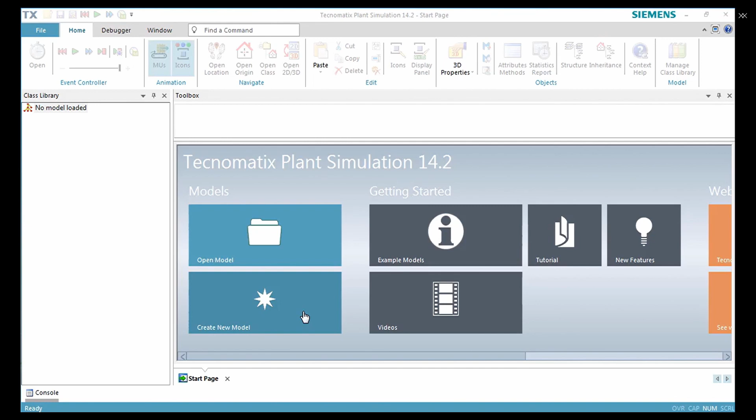This video demonstrates how to work with an exit strategy to make a machine distribute parts among its successors within the production line. As a rule, you will use an exit strategy instead of default transfer behavior when the sequence of operation does not uniquely designate the next station that handles the part.

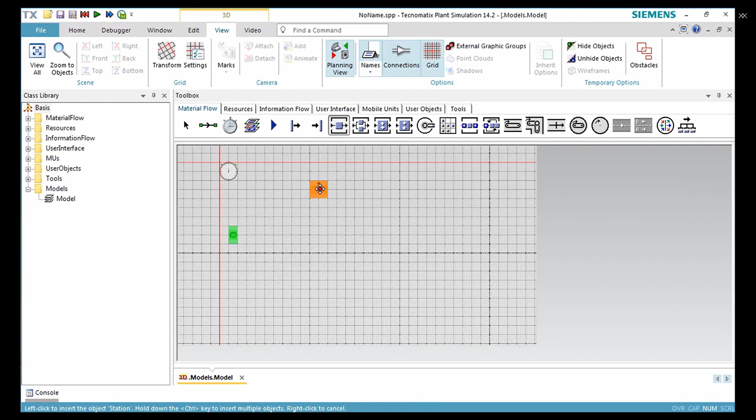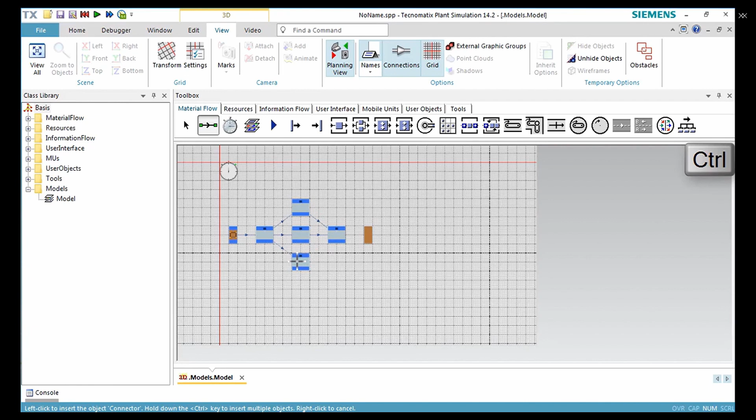To start modeling, we build a production line by inserting a source, several instances of the station and a drain. We then connect them. To better detect the difference in behavior, we increase the processing time of station 2 to 4 minutes.

We want the station to transfer a certain percentage of the parts it processed to the machines succeeding it in the line. We want 20% of the output to go to successor 1, the station named station 1, 30% to successor 2, the station named station 2, and 50% to successor 3, the station named station 3.

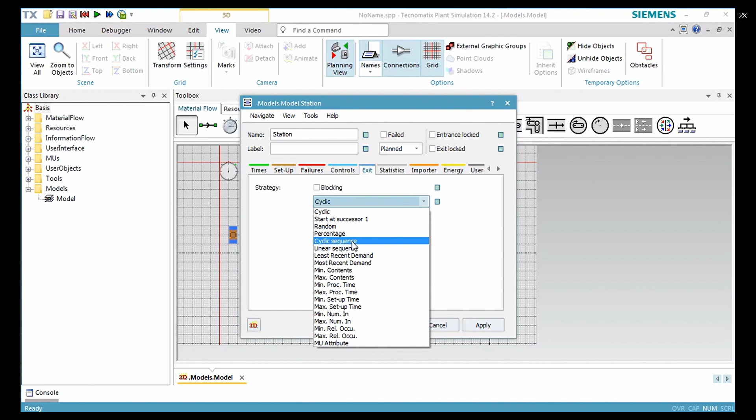To do so, we open the station, click the tab Exit and select the strategy Percentage. We then click Apply. Now we can open the list and type in the percentage. The first successor receives 20%, the second successor receives 30%, and the third successor receives 50% of the parts.

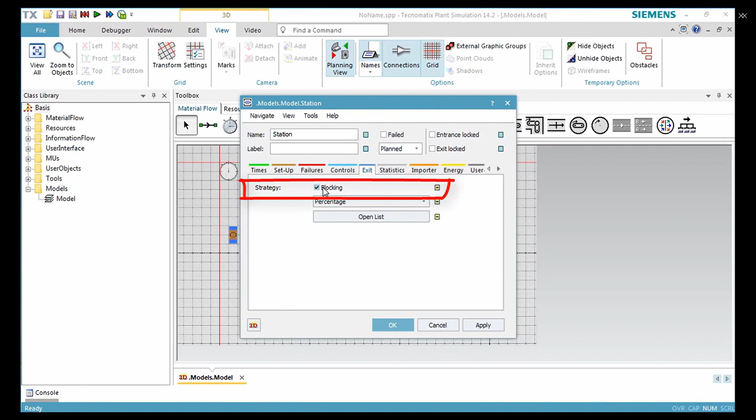To realize the distribution of the parts regardless of the individual states of the successors, we have to select blocking behavior. To find out which is the first connected station, we place the cursor over the connector between station and station 1. This opens a tooltip showing the successor number of the station and the predecessor number of station 1 of the connector.

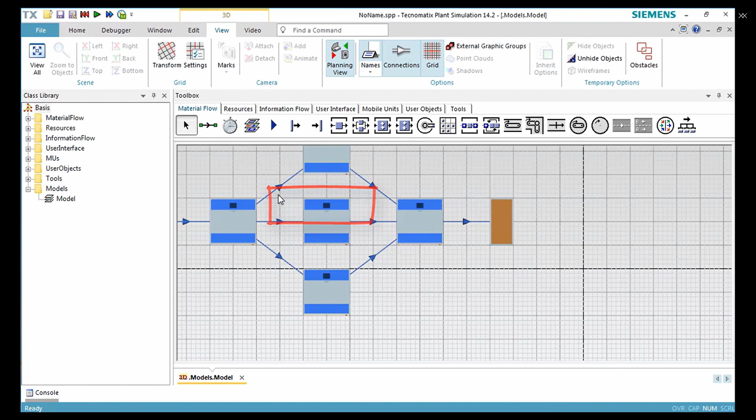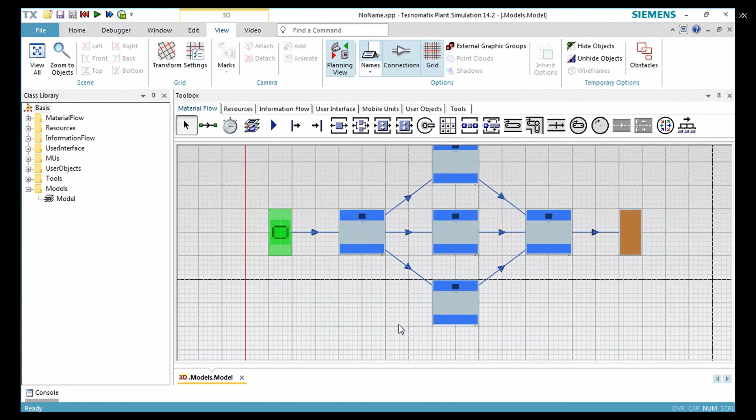To be able to check the percentage more easily, we open the source on tab Attributes, select Number adjustable and enter an amount of 1000 parts. Run the simulation. After a few seconds the simulation run will be finished. Then we can check the result.

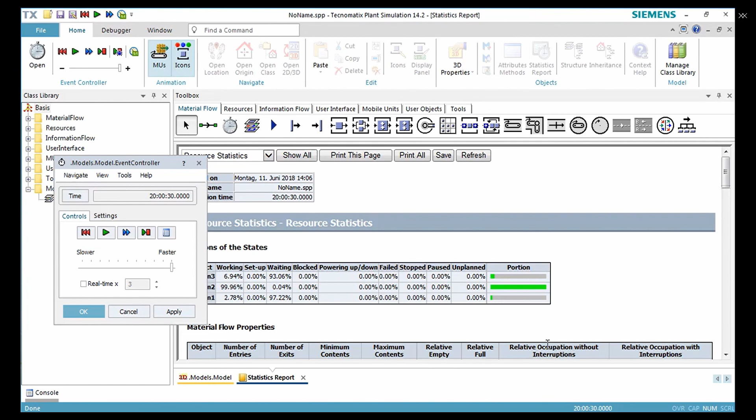We select the stations by dragging the marquee over them. We then press F6 to open a statistics report. The number of entries reflects the desired percentage of 20%, 30% and 50% out of 1000 parts.

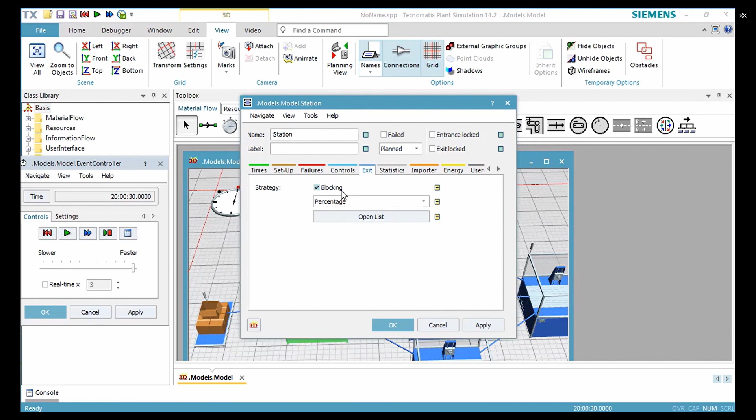Now we can also check the effects of non-blocking behavior. We clear Blocking in the station; it then only moves the part to those successors which can accept one. Now we can run the simulation again and check the statistics reports.

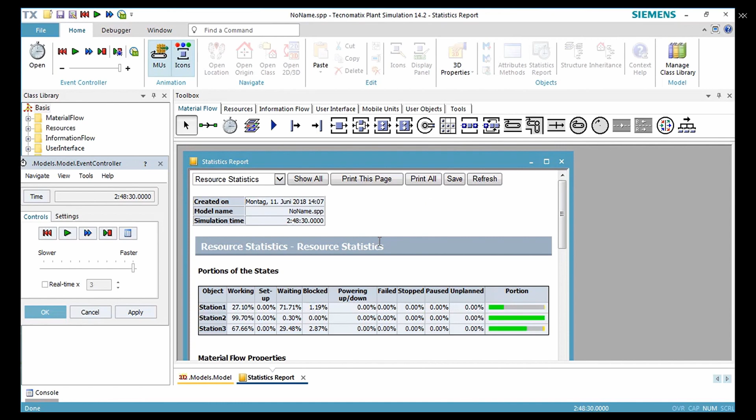We see that the number of entries differs from the desired percentage because station 2 has a longer processing time than the other stations. To gain perfection, keep practicing and experimenting with different values.